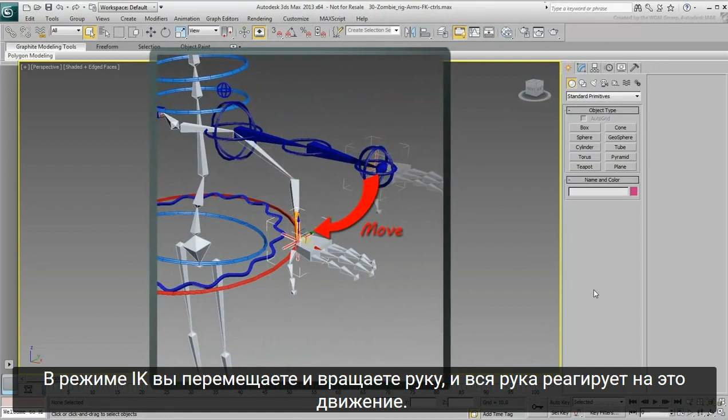With the spine working nicely, it's now time to rig the arms. The arms are fairly complex because they need to rely on both FK and IK manipulation to have the most flexibility. In IK mode, you move and rotate the hand around and the whole arm reacts to that motion.

In FK mode, you usually only rely on rotations of the arm limbs. Furthermore, you will need to think up a way of blending between the two modes. First things first. Here you will set up the FK system to handle rotations. Later, you'll move on to the IK system and the blending between the two modes.

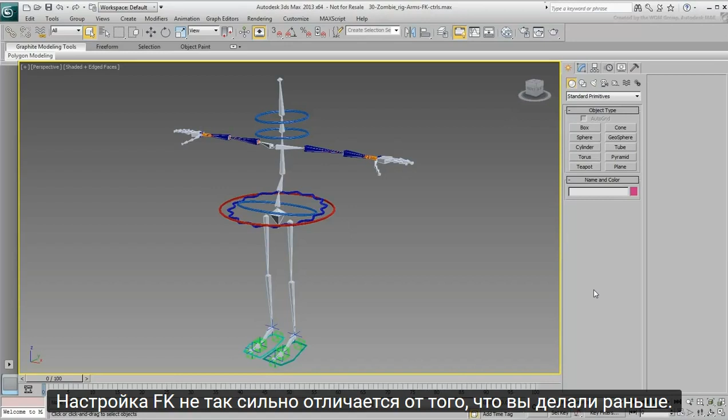The FK setup is not so much different from what you've done before. Basically, you need a set of shape controllers, with each shape to control each joint, that is, the shoulder, elbow, and hand. Zoom in on the left arm. Double-click the shoulder FK bone to select the FK chain. Isolate the selection. As before, you can use any shape you want as a controller.

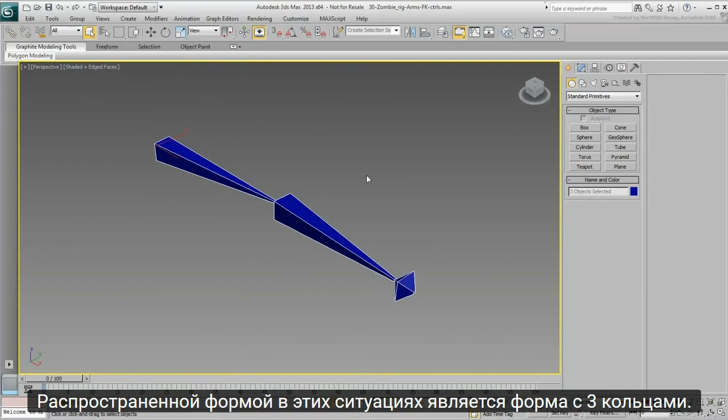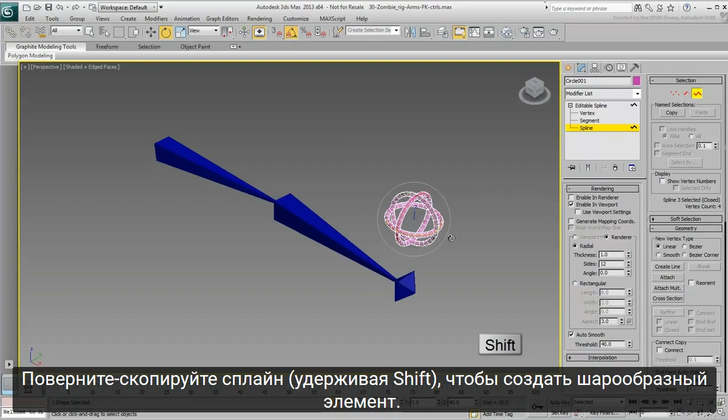A common shape in these situations is the 3-ring shape. It basically starts off as a simple circle, which is then converted to a spline. You can then make the spline renderable in the viewport to see it better. You can then enter spline subobject mode, and with angle snap enabled, rotate copy the spline by holding Shift to create a sphere-like element. Exit spline subobject mode when done.

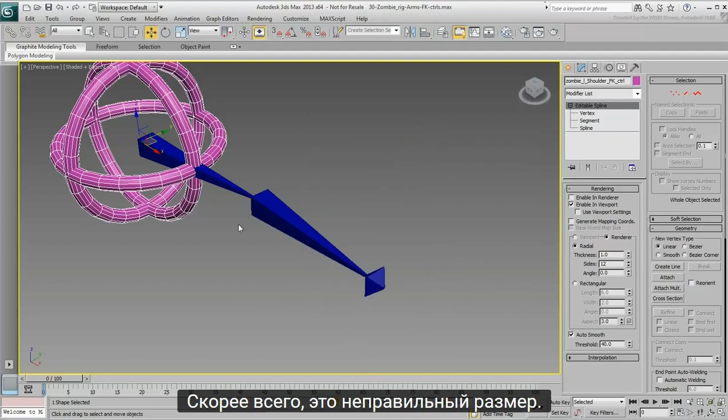Rename the object Zombie Left Shoulder FK Controller. Align it to the shoulder bone, pivot to pivot, in position and orientation. Chances are it's the wrong size. If that's the case, enter spline mode again, select all 3 sub-circles, and scale them up or down to a center point.

You might want to temporarily unhide the geometry category. Seeing the actual zombie geometry will help you decide the size of the controller. It's important to be able to select it even with the geometry displayed. Once done, you can hide the geometry category once more.

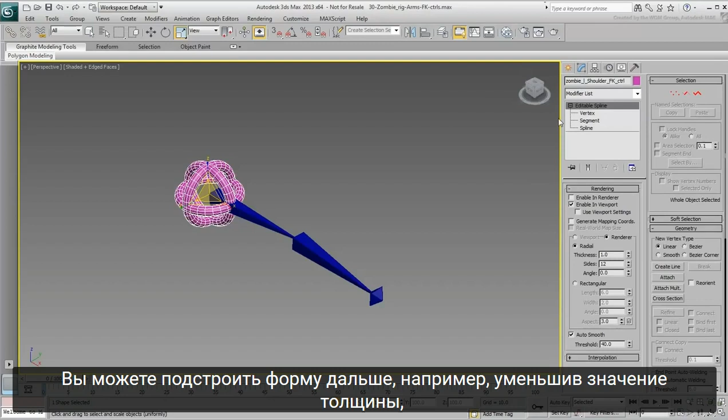You can fine-tune the shape further, for example, by bringing its thickness value down, or number of sides and interpolation. After all, the controller doesn't need to appear in the final render. You can also make it the same wire color as the FK bones. In this case, dark blue color from the AutoCAD palette.

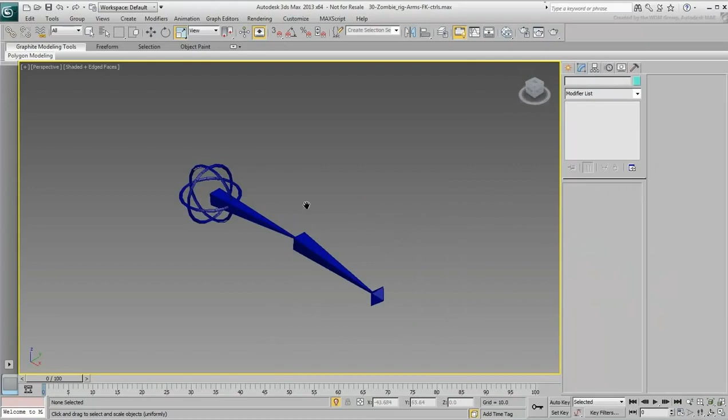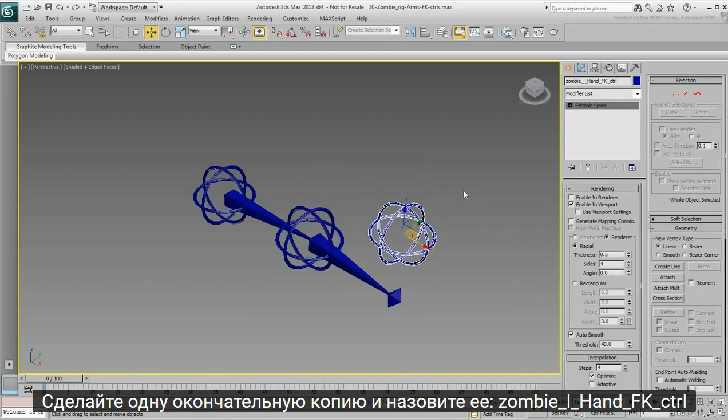Once you have the shoulder controller in place, make a copy and name it Zombie Left Elbow FK Controller. Align it to the forearm bone, again in position and orientation. Make one final copy and name it Zombie Left Hand FK Controller. Align it to the wrist nub.

Keep in mind the 3 controllers do not need to be of the same size. If you wish, you can unhide the geometry category again, and then resize the elbow and hand control shapes to a smaller size. Remember to always do so at a sub-object level.

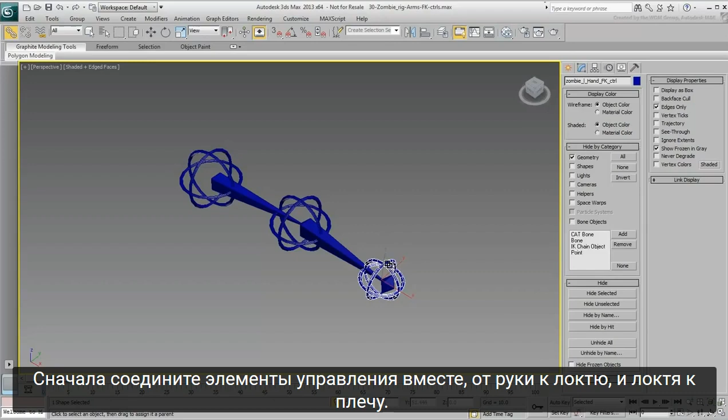To rig the FK chain, it's a pretty straightforward affair. First, link the control elements together, hand to elbow, and elbow to shoulder. Next, select the wrist nub and constrain its orientation to the hand controller.

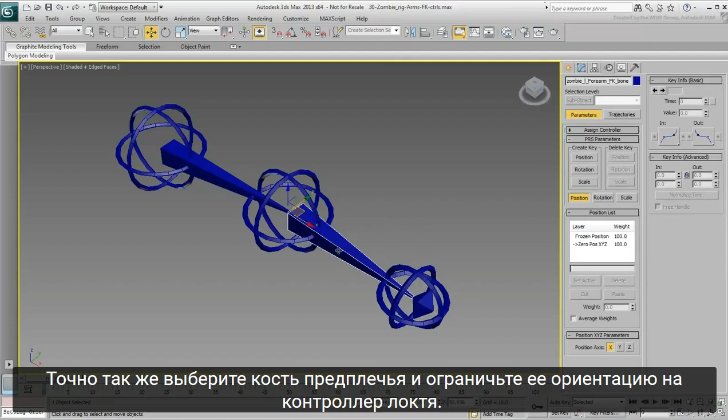Similarly, select the forearm bone and constrain its orientation to the elbow controller. Finally, select the shoulder bone and constrain its orientation to the shoulder controller. As you rotate the controllers now, the FK chain reacts accordingly. There are a few additional adjustments that you can make.

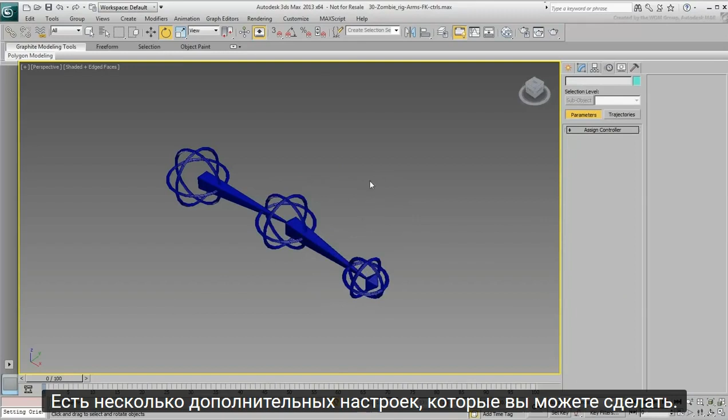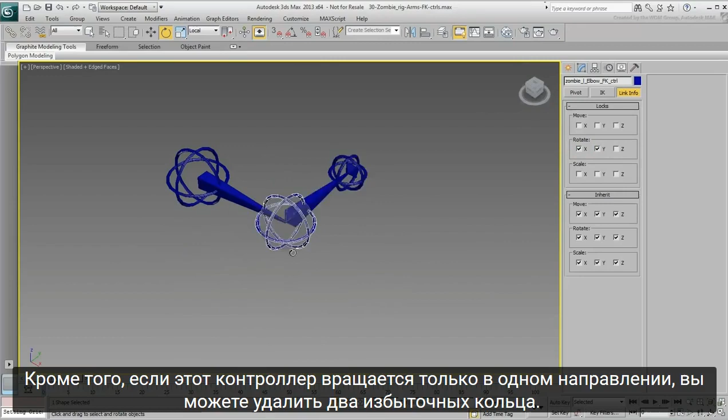Consider the elbow controller. It should really only rotate in one direction on the local Z-axis. You can force that behavior by going to the Hierarchy panel under Link Info and lock the X and Y rotations. Furthermore, if this controller is to only rotate in one direction, then you could potentially delete the two redundant rings. Granted, this is only for visual purposes, but a good reminder of the established limits for this joint.

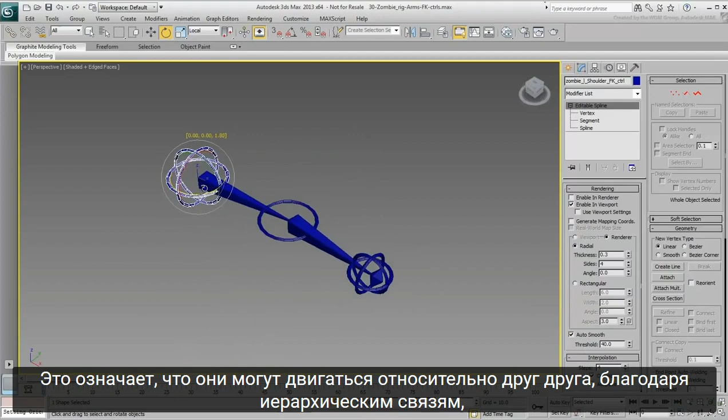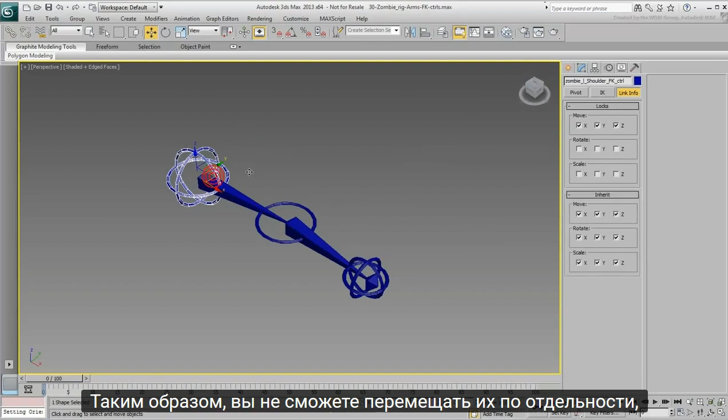Actually, you can push this a little further. The three controllers you just created are for FK rotations only. This means they can move relative to one another, courtesy of hierarchical links, but they really should not be able to move on their own. To prevent any such accidents from happening, you can lock their positions on all three axes. This way, you won't be able to move them around individually, but they do move around relative to each other because of the parent links.

One more thing is left to be done. Exit Isolate Mode and link the shoulder control shape to the clavicle. The whole FK chain needs to react to the clavicle rotation. Try rotating the various controllers to see the effect on the FK chain.

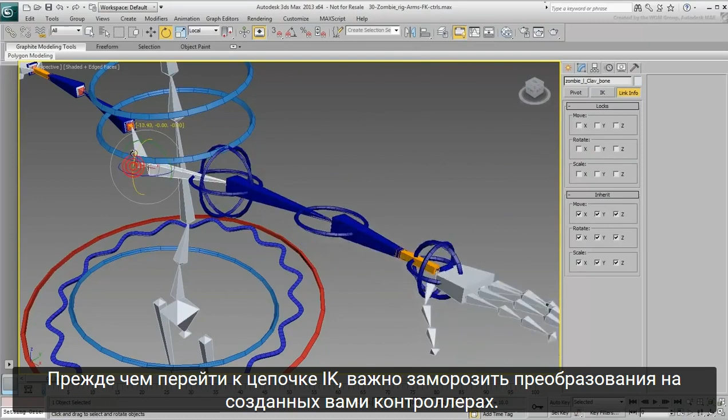Before moving on to the IK chain, it is important to freeze the transforms on the controllers you created. Remember, it is always crucial to record the initial pose as 0, position and orientation. Select all three controllers and use Alt plus right-click to freeze the transforms. In the next movie, you work on the IK chain.